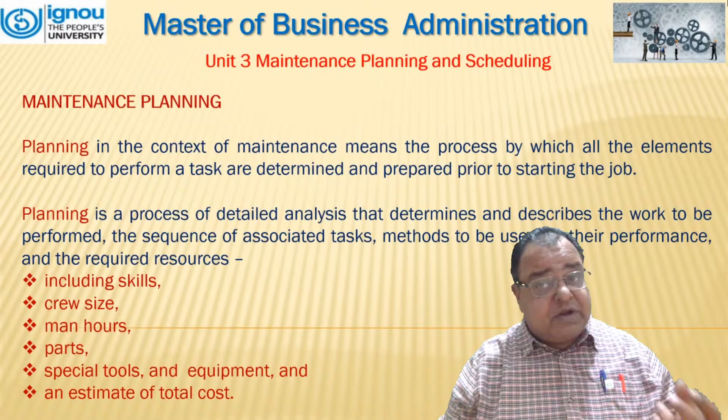It also includes identification of safety precautions, required permits, communication requirements, and the reference documents such as drawings and wiring diagrams.

It addresses essential preparation, execution, and startup efforts, work estimates - that is, the setting of job duration and labor estimates, how much manpower and man hours will be required - and the activation of required procurements are part of the planning process. Maintenance planning is a systematic process that involves identifying, scheduling, and organizing maintenance activities to ensure assets and equipment operate efficiently, safely, and reliably.

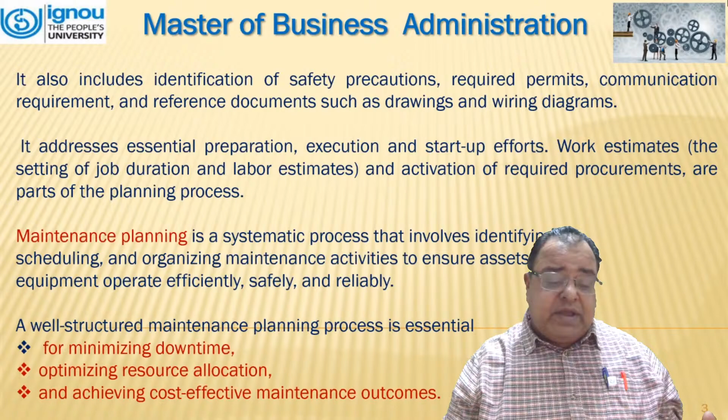A well structured maintenance planning process is essential for minimizing downtime, optimizing resource allocation, and achieving cost effective maintenance outcomes.

Maintenance planning serves several critical purposes, such as minimizing downtime. By scheduling maintenance during planned downtime, unplanned interruptions to operations can be reduced.

Second is resource optimization. Efficient allocation of labor, material, and equipment leads to cost effective maintenance execution.

Third is safety. Proper planning includes safety precautions and measures, ensuring the well being of personnel and assets.

Fourth is asset longevity. Regular and well planned maintenance helps extend the life of the assets, maximizing return on investment.

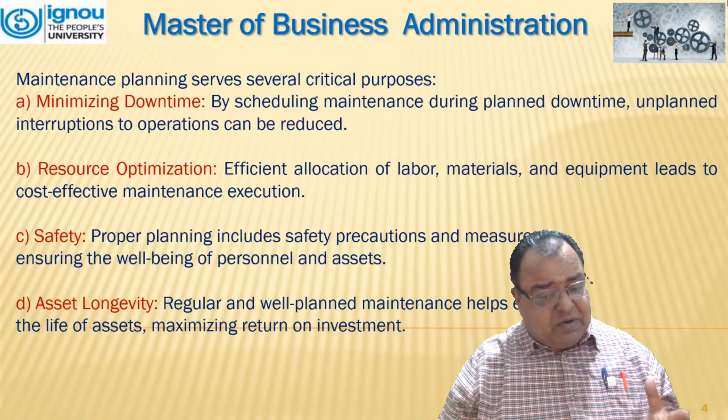The planning process comprises all the functions related to the preparation of the work order, bill of material, purchase requisition, necessary drawings, labor planning sheets, job standards, and all the data needed prior to scheduling and releasing the work order. An effective planning procedure should include the following.

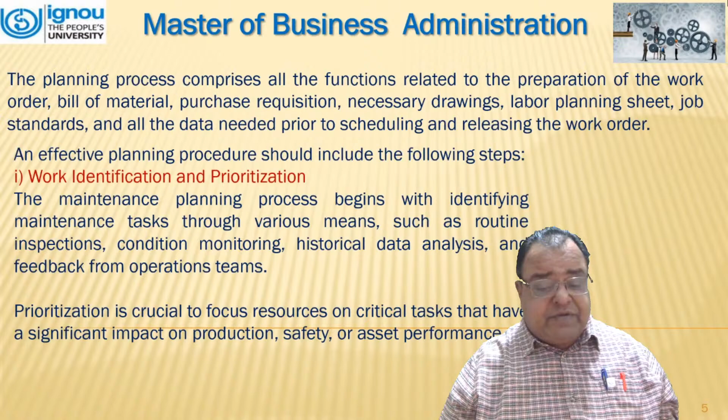First is work identification and prioritization. The maintenance planning process begins with identifying maintenance tasks through various means such as routine inspection, condition monitoring, historical data analysis, and feedback from the operations team. Prioritization is crucial to focus resources on critical tasks that have a significant impact on production, safety, and asset performance.

Secondly, defining scope and objectives. Each maintenance task should have a clearly defined scope, including the specific work to be performed, necessary resources, and expected outcomes. Objectives such as reducing downtime or improving asset reliability should also be outlined.

Third is resource allocation. Efficient resource allocation involves determining the manpower, tools, equipment, and material required for each maintenance task. This ensures that resources are available when needed and that maintenance activities are not delayed due to lack of resources.

Fourth is estimating job duration and complexity. Accurate estimation of task duration is essential for effective scheduling. Complex tasks might require longer preparation time or specialized expertise, while routine tasks can be completed quickly.

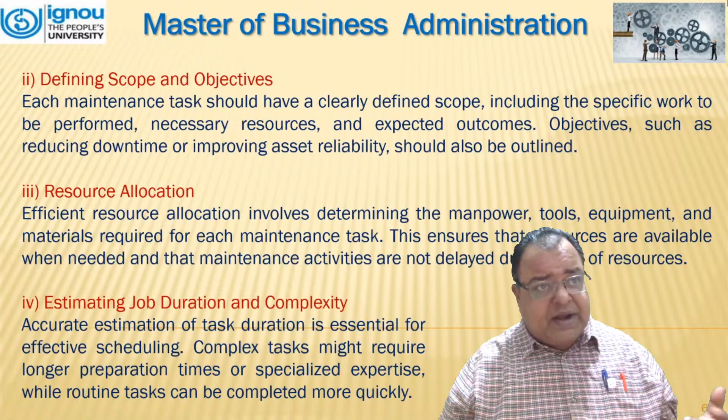Fifth is developing maintenance work orders. Maintenance work orders are detailed documents that outline the task, resources, safety precautions, and scheduling of each maintenance activity. They serve as a guide for maintenance technicians and provide a record of the work performed.

Now, what is the role of a maintenance planner? The basic maintenance planning principles are: the maintenance planners are organized into a separate department to facilitate specializing in planning techniques as well as focusing on future work.

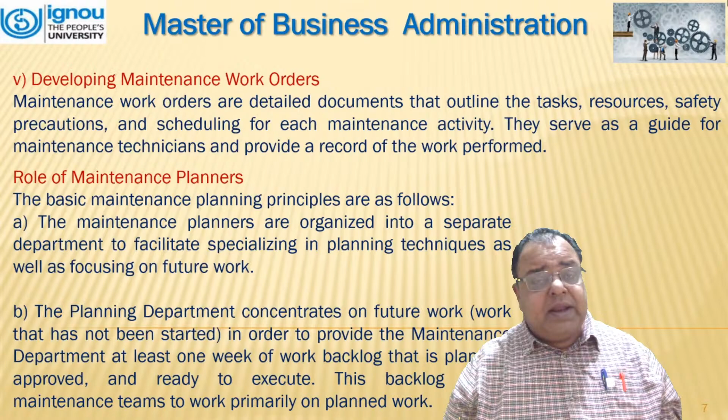Secondly, the planning department concentrates on future work, work that has not been started, in order to provide the maintenance department at least one week of work backlog that is planned, approved, and ready to execute. This backlog allows the maintenance department to work primarily on planned work.

The planning department maintains a simple, secure file system based on equipment tag numbers. This file system enables planners to utilize equipment data and information learned on previous work to prepare and improve work plans, especially on repeated maintenance tasks.

The majority of maintenance tasks are repetitive over a sufficient period of time. Fourthly, the planners use personal experience and file information to develop work plans to avoid anticipated work delays and quality or safety problems. As a minimum, planners are experienced top level technicians that are trained in planning techniques.

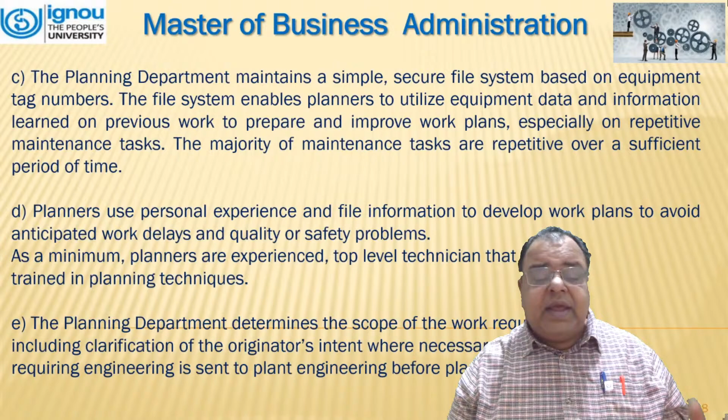Fifth, the planning department determines the scope of the work request, including clarification of the originator's intent where necessary. That is, work requiring engineering is sent to plant engineering before planning.

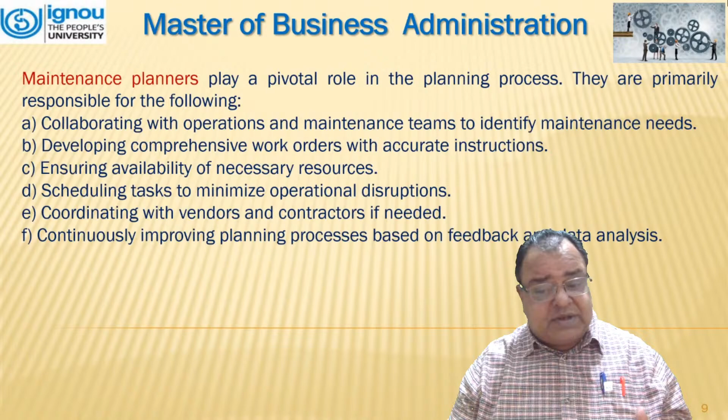Maintenance planners play a pivotal role in the planning process. They are primarily responsible for collaborating with operations and maintenance teams to identify maintenance needs, developing comprehensive work orders with accurate instructions, ensuring availability of necessary resources, scheduling tasks to minimize operational disruptions, coordinating with vendors and contractors if needed, and continuously improving planning processes based on feedback and data analysis.

The next part is maintenance scheduling. Maintenance scheduling is a critical aspect of effective maintenance management that involves coordinating and sequencing maintenance tasks in a way that optimizes asset availability, minimizes operational disruptions, and maximizes resource utilization. A well structured maintenance schedule ensures that maintenance activities are performed efficiently while aligning with production requirements. Maintenance scheduling plays a crucial role in achieving operational efficiency, asset reliability, and cost effectiveness by minimizing disruptions.

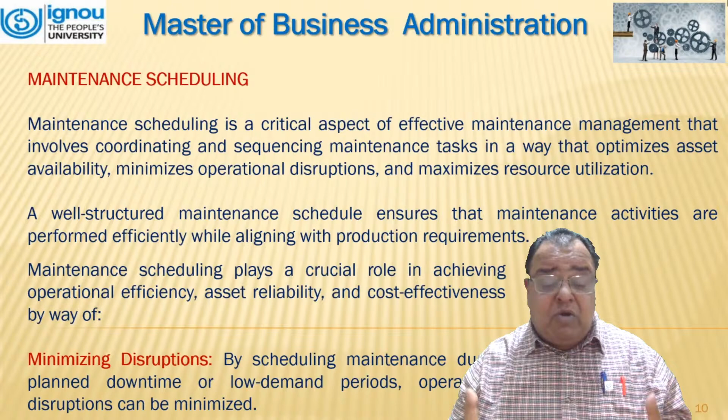That can only be done by scheduling maintenance during planned downtime or low demand periods. Operational disruptions can be minimized. Optimizing resource utilization means efficient scheduling ensures that labor, material, and equipment are used effectively, reducing costs, and balancing production and maintenance needs. Scheduling prevents conflict between production and maintenance requirements.

Maintenance scheduling is a process by which jobs are matched with resources and sequenced to be executed at a certain point in time.

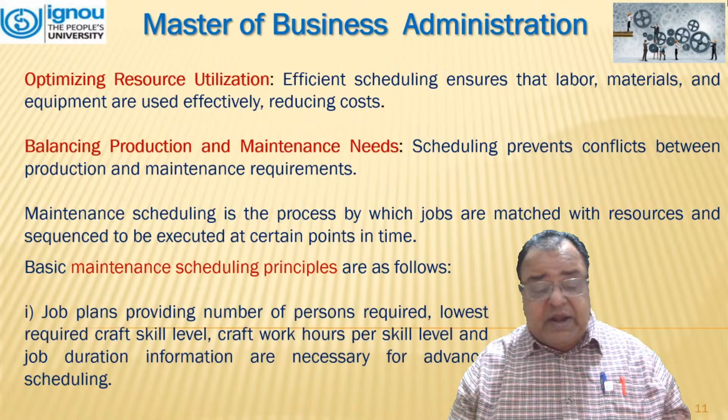Basic maintenance scheduling principles are: job plans providing number of persons required, lowest required craft skill level, work hours per skill level, and job duration information are necessary for advanced scheduling. Weekly and daily schedules must be adhered to as closely as possible. Priorities must be placed on new work orders to prevent undue interruption of these schedules.

Thirdly, a scheduler develops a 1 week schedule for each crew based on craft hours available, forecast that shows highest skill levels available, job priorities, and information from job planners.

Fourthly, the 1 week schedule assigns work for every available worker. The schedule allows for emergencies and high priority reactive jobs by scheduling a sufficient amount of work hours on easily interrupted tasks. The crew supervisor develops a daily schedule 1 day in advance using current job progress, the 1 week schedule, and new high priority reactive jobs as a guide.

The crew supervisor matches personnel skills and tasks. The crew supervisor also handles the current day's work and problems, even to rescheduling the entire crew for emergencies.

Wrench time is the primary measure of workforce efficiency and of planning and scheduling effectiveness. Work that is planned before assignment reduces unnecessary delays during jobs, and work that is scheduled reduces delay between jobs. There are several types of maintenance scheduling approaches, which can be broadly categorized into the following three types.

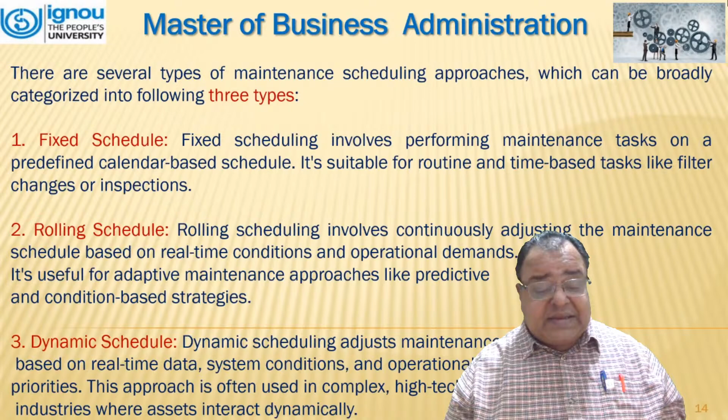Planning the maintenance work is a prerequisite for sound scheduling. While a robust maintenance plan ensures flawless scheduling of maintenance jobs, it is often suggested that the following steps need to be followed while drawing up a maintenance schedule.

First one is work order review: how much work has to be performed. The scheduling process starts with reviewing maintenance work orders, understanding their scope, and assessing the resources required. This also involves sorting out backlog work orders by crafts.

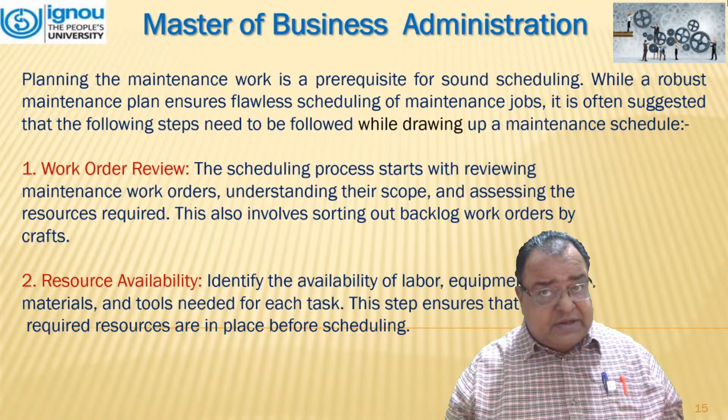Secondly, resource availability. Identify the availability of labor, equipment, materials, and tools needed for each task. This step ensures that required resources are in place before scheduling.

Third one is task sequencing. Determine the optimal sequence in which tasks should be performed. Sequencing considers factors such as task dependency, resource availability, and production needs. Also considered are job duration, location, travel distance, and the possibility of combining jobs in the same area.

Fourth one is downtime coordination. For tasks that require asset downtime, coordinate with production to minimize the impact on operations.

Fifth one is schedule creation. We generate a comprehensive maintenance schedule that outlines the timing, sequence, resources, and estimated duration of each task.

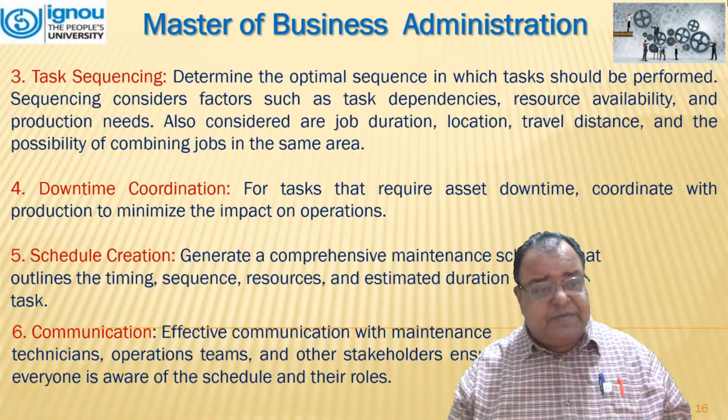Sixth one is communication. Effective communication with maintenance technicians, operation teams, and other stakeholders ensures everyone is aware of the schedule and their roles. The maintenance schedule can be prepared at three levels, depending on the horizon of the schedule. Level 1 is long range, or master schedule.

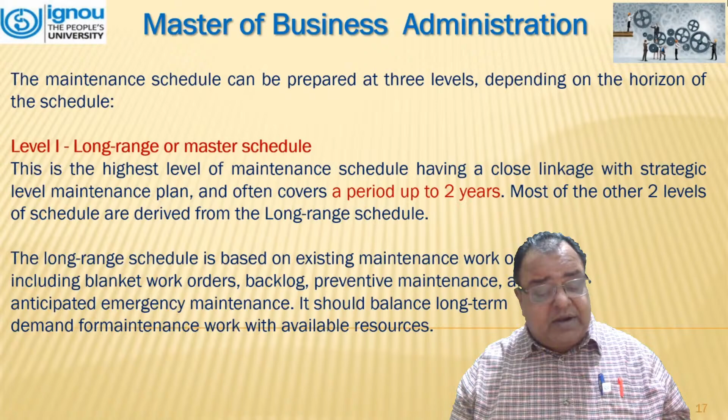This is the highest level of maintenance schedule, having a close linkage with strategic level maintenance plan, and it covers a period of up to 2 years. Most of the other two levels of such schedules are derived from the long range schedule. Long range schedule is based on existing maintenance work orders, including blanket work orders, backlog, preventive maintenance, and anticipated emergency maintenance. It should balance long term demand for maintenance work with available resources.

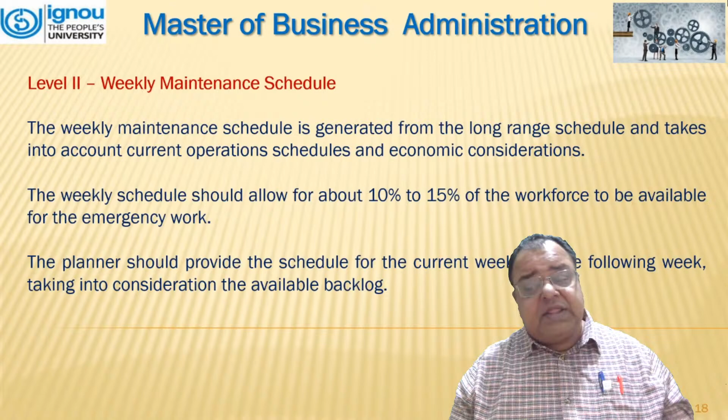Level 2 is weekly maintenance schedule. The weekly maintenance schedule is generated from the long range schedule and takes into account the current operation schedules with economic considerations. The weekly schedule should allow for about 10 to 15% of the workforce to be available for emergency work. The planner should provide the schedule for the current week and the following week, taking into consideration the available backlog if they are there.

Level 3 is daily maintenance schedule. As the name suggests, this schedule encompasses the work of maintenance tasks to be completed on a daily basis. The daily schedule is generated from the weekly schedule and is usually prepared the day before. This schedule is frequently interrupted to perform emergency maintenance. The established priorities are used to schedule the jobs, and in some organizations, the schedule is handed to the area supervisor who assigns the work according to the established priorities.

Now we have heard the word maintenance work orders. Now we will see what these actually are. The exercise of maintenance scheduling results in creation of maintenance work orders. Maintenance work orders are essential documents that serve as a roadmap for executing maintenance tasks. They provide a detailed description of the work to be performed, necessary resources, safety precautions, and scheduling.

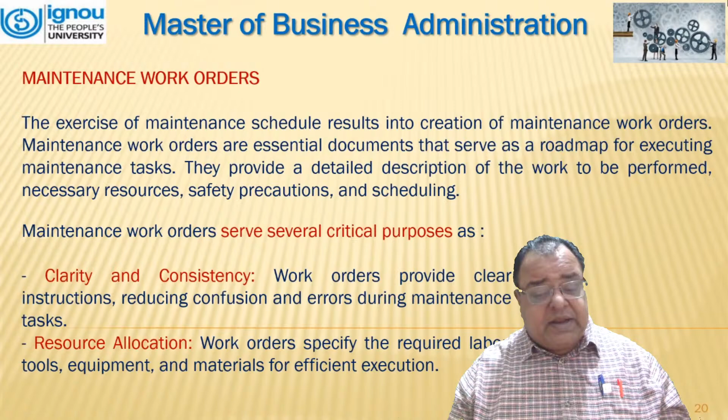Maintenance work orders serve several critical purposes, such as clarity and consistency. Work orders provide clear instructions, reducing confusion and errors during maintenance tasks. Secondly, resource allocation - work orders specify the required labor, tools, equipment, and materials for efficient execution. Third is safety - safety instructions and precautions are outlined to protect personnel and assets from damage. Fourth is documentation - work orders create a historical record of maintenance activities, aiding in future analysis and decision making.

A comprehensive work order should include the following components. First is asset information, which specifies the equipment or asset to be worked on, including its location, identification number of the machine, and any relevant technical details.

Secondly, description of the work - what is the nature. Provide a clear and detailed description of the maintenance task to be performed. This may include specific steps, procedures, and special instructions.

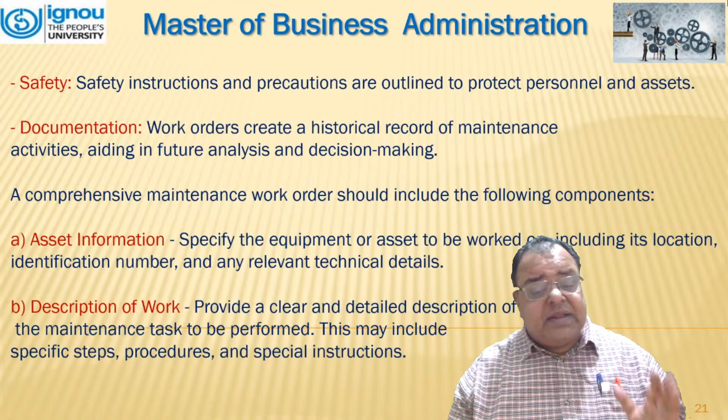Thirdly, resource requirements - outline the necessary resources such as skilled labor, tools, equipment, and materials needed to complete the task. Safety precautions, which includes safety guidelines and precautions that must be followed to ensure the well being of the personnel and the protection of the assets.

Scheduling - this specifies the start and end dates of the maintenance task. For tasks that require downtime, ensure coordination with production schedules. Authorization and signatures - this includes space for necessary approvals and signatures from relevant parties such as maintenance supervisors, managers, or safety officers.

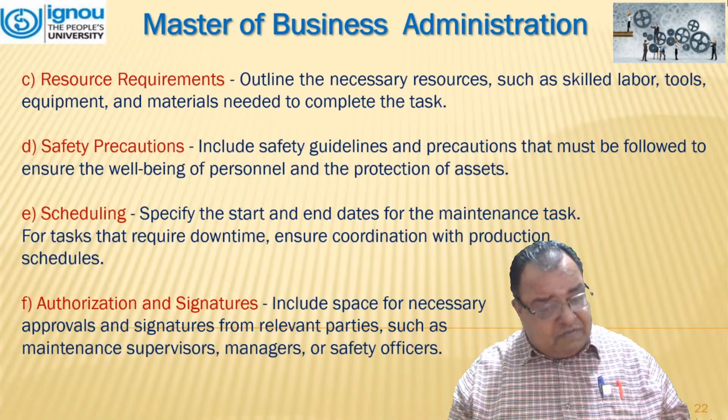Depending on the organization's needs and the complexity of the task, an organization may adopt various forms of maintenance work order systems, starting from manual systems to a highly automated process with the support of technology. Some of these are paper-based forms. These are traditional paper-based forms that provide a structured template for writing down work order details, and they are easily accessible and can be used in various environments because that is only information on paper.

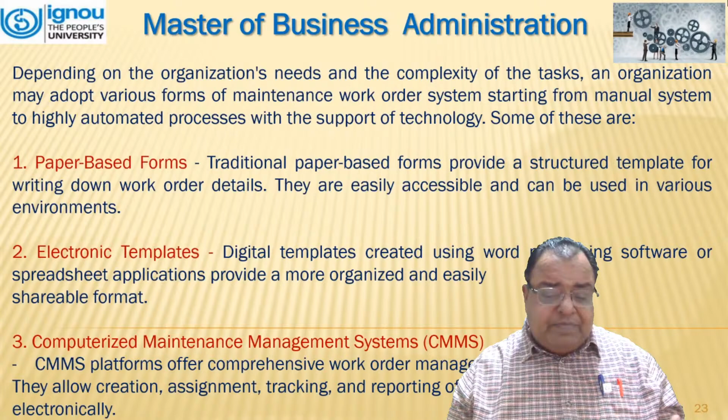Second one is electronic templates. Digital templates created using word processing software or spreadsheet applications provide a more organized and easily shareable format. Third one is computerized maintenance management system, that is CMMS. This CMMS platform offers comprehensive work order management. They allow creation, assignment, tracking, and reporting of work orders electronically.

Fourth one is mobile application. Mobile apps enable technician access and update of work orders in real time, enhancing communication and efficiency. The fifth one is barcode or QR code, that is quick response code, work orders. Using barcodes or QR codes on equipment allows technicians to quickly scan and access digital work order details.

Now we move to block 2, that is maintenance resource management. In that, unit 4 is there, which is maintenance costing and budgeting. That means now we will be talking about the costs and how the budgeting process for maintenance application is performed in an organization. All the big manufacturing units maintain their own maintenance and repair department. A series of service order accounts are opened to ascertain the exact cost of each maintenance or repair work.

Each service order will be given a distinct number and will be debited with all expenditure of material, labor, and other direct charges for repair and maintenance. An addition is also made for work and office indirect expenses on a suitable basis. The total will then be included in factory overheads and is also used for maintenance planning, budgeting, and control.

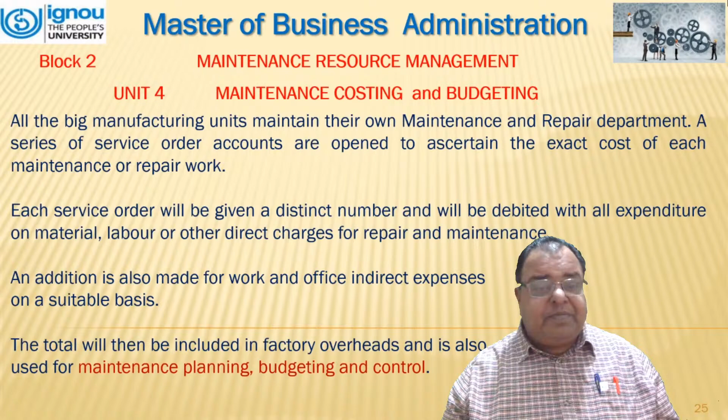Sometimes an expenditure is incurred by the company's own workmen, which gives rise to a capital asset. In such cases, the expenses on material and labor are debited to the capital order account. All such expenditures will not be debited to work overhead, but be capitalized by passing on an appropriate entry in the books of account.

Maintenance cost is generally the total cost incurred in doing the maintenance job and keeping a maintenance organization. The treatment of costs associated with other activities like constructions, modifications, rearrangement, and removal of building equipment and assets depends on the nature of job undertaken.

Cost of no maintenance or inadequate maintenance are like opportunity costs. These lost opportunities include a lower rate of output, poor quality of products, wastage, defects, damage to equipment, reduction in useful life of the equipment, etc. These costs are not recorded in any accounting system and are often overlooked while exercising control over maintenance costs. A good maintenance policy should incorporate the maintenance and lost opportunity costs due to inadequate maintenance.

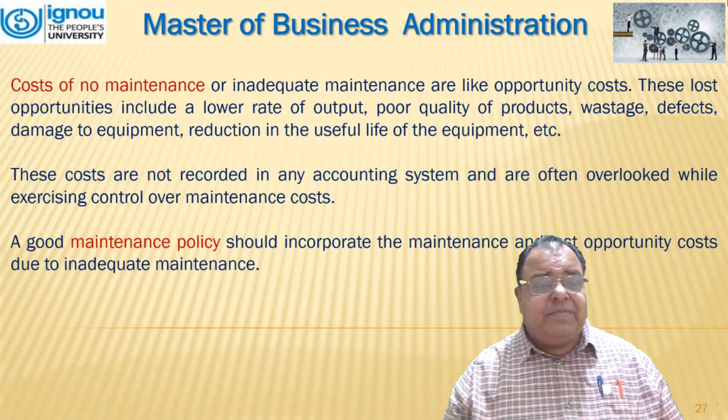Now, what is meant by maintenance costing? Costing is a technique of ascertaining costs and it consists of analyzing, recording, classifying, and appropriately allocating expenditures to determine the cost of products or services, comparing them against standards or budgets, reporting and recommending.

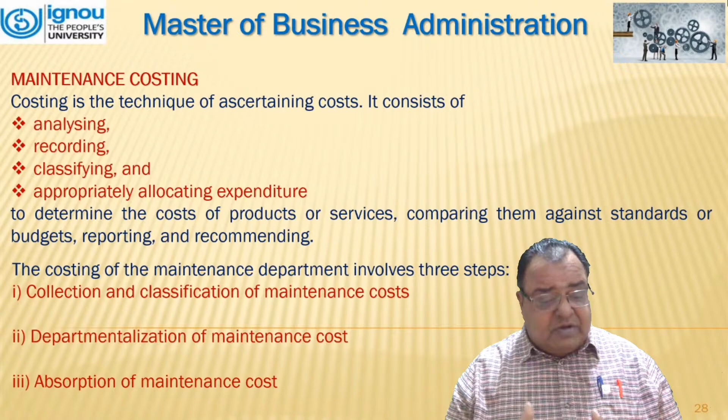The costing of the maintenance department involves three steps. First is collection and classification of maintenance costs. Second is departmentalization of maintenance cost. And the third is absorption of maintenance cost.

We'll see what collection and classification of maintenance cost is. Maintenance cost includes cost incurred on a large number of activities. These could be cost of manpower and facilities dedicated to maintenance department for repair and maintenance, cost of preventive maintenance to improve the availability of the assets, and cost of resources like equipments and other facilities for condition monitoring and diagnostic maintenance.

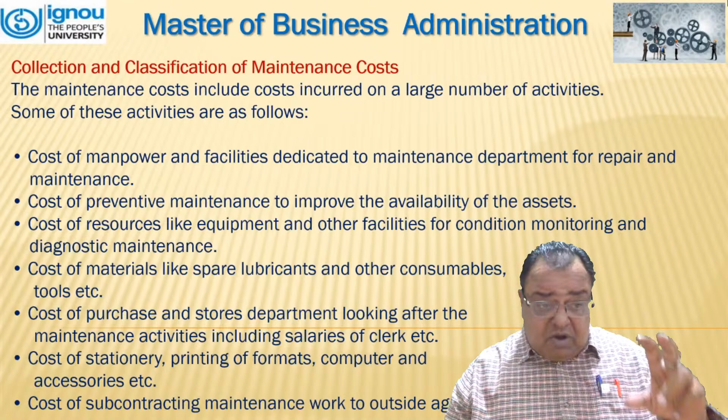Cost for material like spare lubricants and other consumables, tools, etc. Cost for purchase and stores department, looking after the maintenance activities, including salaries of clerks, etc. Cost of stationery, printing of formats, computers and accessories. Cost of subcontracting maintenance work to outsider agencies. All these parameters are included into the maintenance cost.

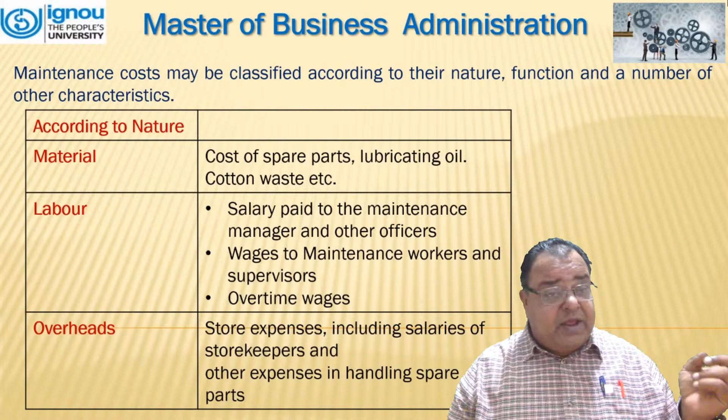Maintenance cost may be classified according to their nature, function, and number of other characteristics. When we talk about material, it includes the cost of spare parts, lubricating oil, cotton waste, etc. In terms of labor, salary paid to the maintenance manager and other officers, wages to maintenance workers and supervisors, and overtime wages are also included. Thirdly, overheads include store expenses, including salaries of storekeepers and other expenses in handling spare parts.

The second norm is according to normality - normal maintenance cost and abnormal maintenance cost. According to the type of maintenance action, it can be breakdown maintenance activity or preventive or planned maintenance activity. According to controllability, it's controllable cost and uncontrollable cost. According to behavior, it could be fixed cost, variable cost, and semi-variable cost. And according to the type of budget, it is revenue cost or capital cost.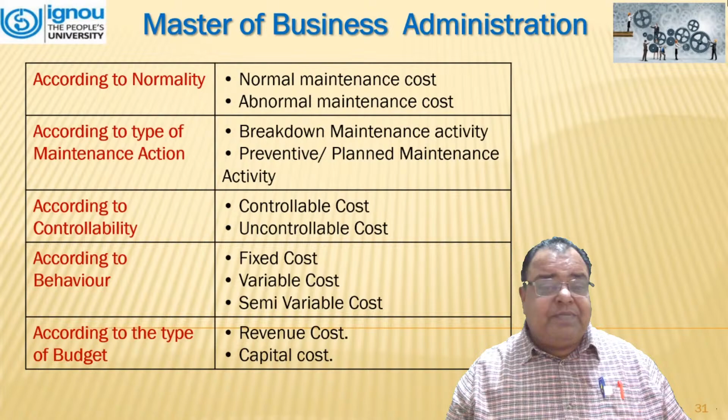Second one was departmentalization of maintenance cost. After classification and collection of maintenance cost, the next step is distribution of cost to the different processes, equipments, products or departments. This involves the allocation and apportionment of maintenance cost.

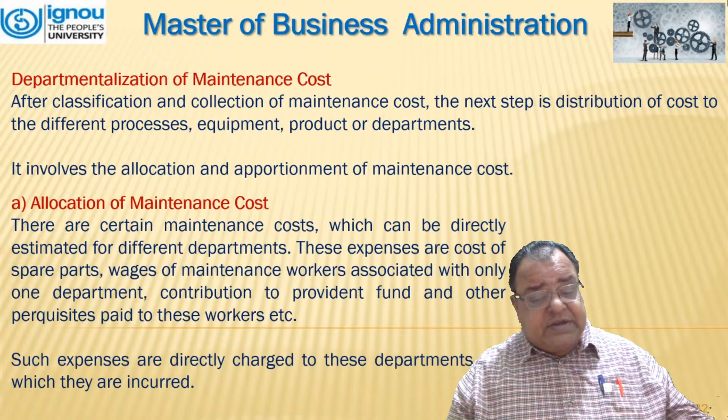Allocation of maintenance costs - under this, there are certain maintenance costs which can be directly estimated for different departments. These expenses are cost of spare parts, wages of maintenance workers associated with only one department, contribution to provident fund and other perquisites paid to these workers, etc. Such expenses are directly charged to these departments for which they are incurred.

Second one is apportionment of maintenance cost. Certain expenses such as salary of maintenance manager and maintenance staff catering to more than one department, consumables like lubricating oil, gloves, cotton waste, etc., are incurred for the factory as a whole, and therefore they will have to be apportioned over all departments. There is no hard and fast rule as regards the basis to be applied for apportionment of maintenance costs.

The following methods can work as guiding rules. It can be according to the capital value of the asset, according to technical estimates, according to production hours of the equipment, actual services utilized if records are available, according to hours worked on each equipment or department, and according to past experience.

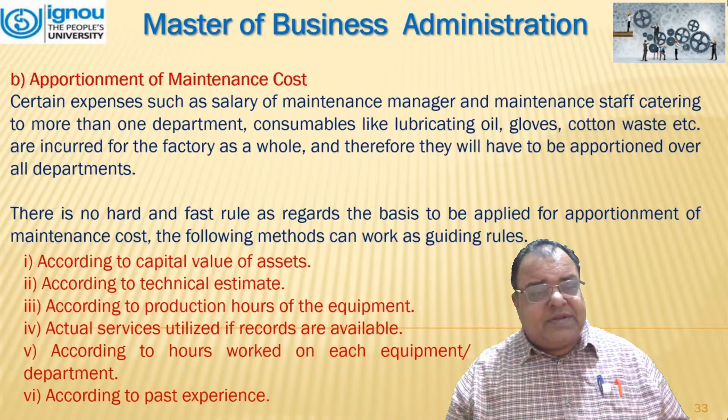Now, distribution of office and administration overheads of maintenance department. The office overheads of maintenance department shall be charged to different equipments, processes, departments on a suitable basis. Since maintenance overheads constitute a small portion of the total cost, it will not be advisable to follow a complicated method for their absorption. A blanket overhead rate may be computed for the entire maintenance work, calculated as total maintenance overhead divided by total maintenance cost into 100.

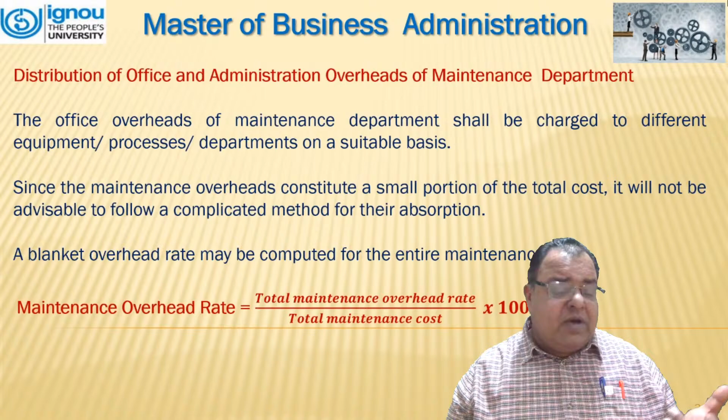The following are some of the guidelines in devising a procedure. We should avoid duplication and unnecessary work in meeting the different needs of the accounting and maintenance department, and ensure that the procedure provides timely information to both departments in a form which aids effective control.

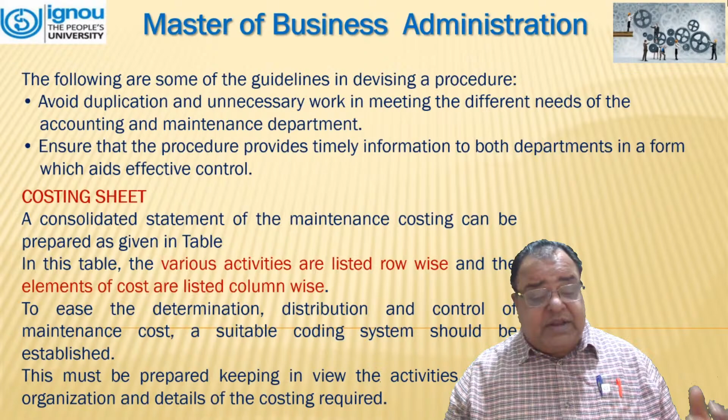Then comes the costing sheet. A consolidated statement of maintenance costing can be prepared as given in the table. In this table, the various activities are listed row-wise and the elements of cost are listed column-wise. To ease the determination, distribution, and control of maintenance cost, a suitable coding system should be established, prepared keeping in view the activities of the organization and details of costing required.

The production establishment of the organization and the work classification within them must be coded in a manner that segregates them by units, operations, or plant. Similar items at different units should have a common code modified to identify the particular unit concerned. Further, these operations and activities must be allotted the appropriate cost account classification, which must be so coded as to segregate them. If these two requirements are met, costs can be equitably distributed and controlled with any desired degree of refinement.

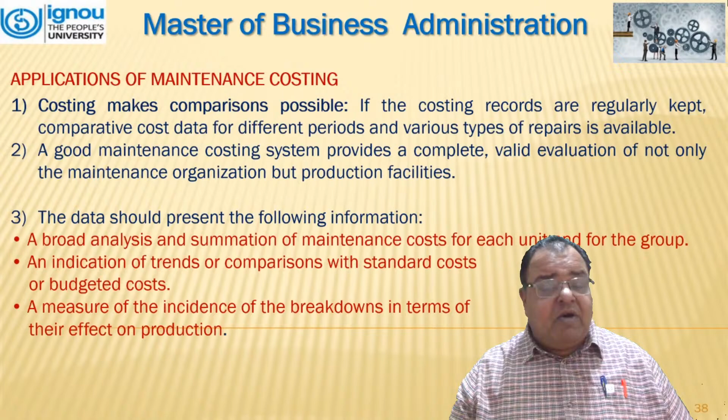Fourthly, the report of the costing can be useful in the following manners: labor control and productivity improvement, workload measurement, formulation of objectives and policies, production cooperation, and staff department service.

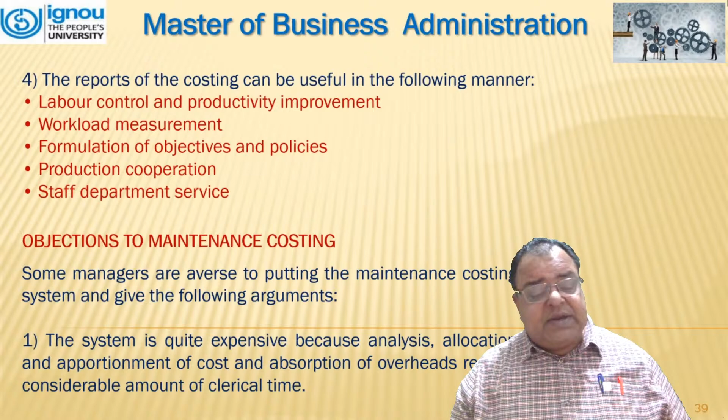Now, what are the objections to maintenance costing? Some managers are averse to putting a maintenance costing system in place and give the following arguments. The system is quite expensive because analysis, allocation, and apportionment of cost and absorption of overheads require considerable clerical time. Secondly, a costing system in itself does not control cost or improve efficiency. If management is alert and efficient, it can control costs without the aid of this system.

The next title is maintenance budgeting. A budget is a detailed plan of operations for some specific future period. It is an estimate prepared in advance of the period to which it applies. Different types of budgets are prepared by an industrial concern for different purposes. The maintenance budget is an estimate of requirements for spare parts, manpower, consumables, and other expenses, prepared to bring efficiency and economy in maintenance activities.

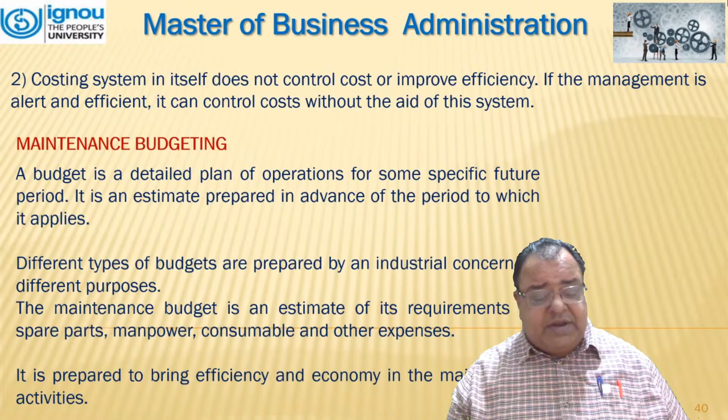Five key elements of maintenance budget. When creating a maintenance budget for the first time, there are five inputs one must take into account: asset status, original equipment manufacturers data, historical performance, operating strategy, and maintenance strategy.

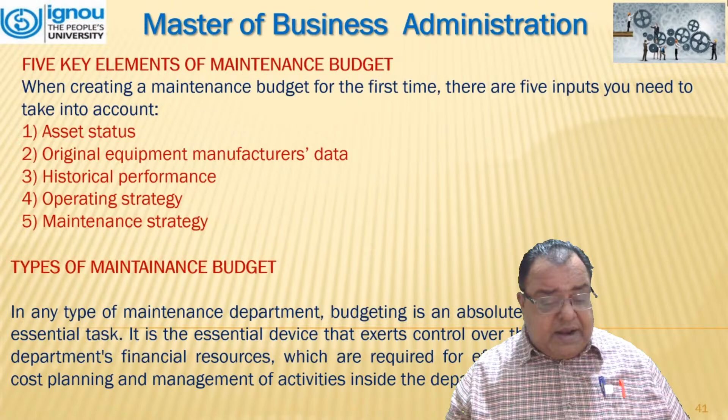What are the different types of maintenance budgets? In any type of maintenance department, budgeting is an absolutely essential task. It is the essential device that exerts control over the department's financial resources, which are required for efficient cost planning and management of activities inside the department.

There are typically two distinct budget formats utilized in the upkeep and maintenance of facilities. Both of these budgets are referred to as the operational budget and the project budget.

The operating budget evaluates each category of operating expenses projected for every department within the organization. It usually consists of at least four headings: the cost of labor, the cost of required materials, the cost of tools and technical resources, and the cost of contracted services.

The cost of labor consists of four concepts: the annual fixed amount received by each department worker, staff transport costs to the plant (in some countries the employer takes care of this cost), and organizations with excellent management promote training among workers by subsidizing training costs and obligatory social costs of the organization.

The second type is the project budget. This budget is concerned with special projects such as major capital equipment purchases and major construction projects. The funds required for such projects are not included in the operating cost, but come from another source. The project budget is divided into different types, such as labor, material, and overhead expenses needed to complete the defined project.

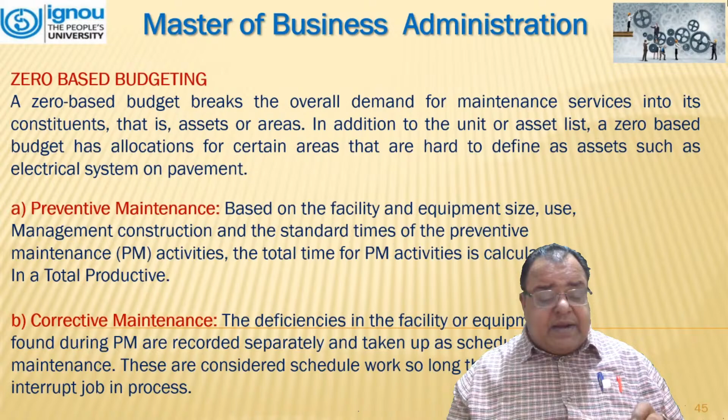The third one is user maintenance, or UM, which is maintenance based on requests received from the user department. This includes both routine and breakdown maintenance required. Previous year's data can be used to budget this exercise.

Seasonal maintenance includes review of roofing and checking of air conditioners before summer. Some percentage of seasonally driven emergencies are also included in this list, and budgets are based on history.

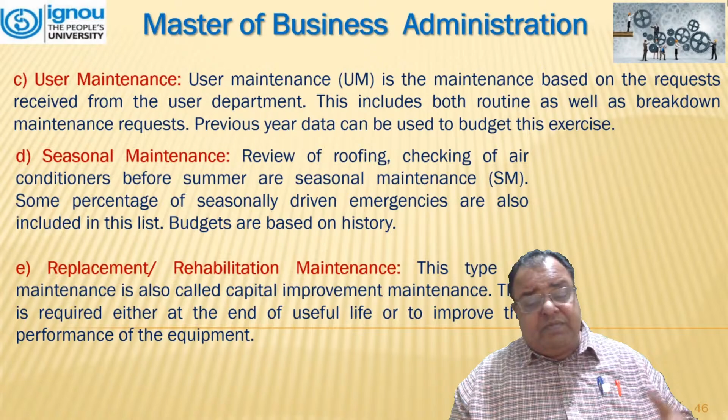The fifth type is replacement and rehabilitation maintenance, also called capital improvement maintenance. This is required either at the end of useful life of equipment or to improve its performance.

Social demand activities include preparation for visiting dignitaries or work on non-organizational equipment and facilities, that is, charity work. These estimate the hours and material needed for such activities.

Expansion: any expansion in the size of facility, size of workforce, or addition of scope of control will expand the overall budget requirements. New facilities disrupt current activities as well as taking direct time.

Catastrophes: every part of the country has characteristic catastrophes, such as floods, hurricanes, fire, or even earthquakes, and some labor hours and materials are budgeted for this.

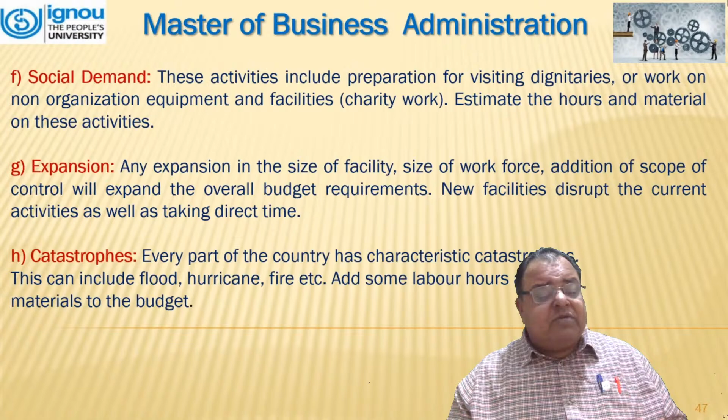What is the importance of a maintenance budget? The process of developing a comprehensive maintenance budget can be difficult, as there are many factors to take into account, several stakeholders to consult, and a large amount of data to sort through.

Because of the difficulty of the task, some maintenance managers are tempted to simply use the expenditures from the year before and increase them by a small amount. Bearing in mind the repercussions that could result from doing it wrong, this strategy is not always the most appropriate one.

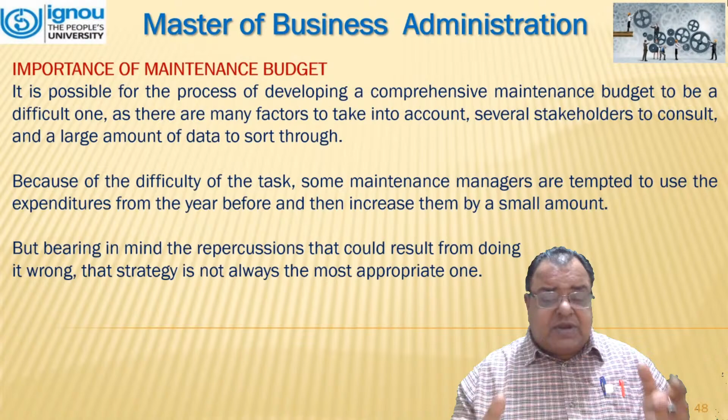Now, Unit 5, which is spare parts and inventory management.

The management of a company's spare parts, stock, and warehouse are frequently tied not only to the operation of the company but also to the maintenance division of the organization. This is owing to the fact that the company's goods require repair and maintenance, which in turn requires the usage of both spare parts and stock, as well as storage space. It is an essential part of managing daily upkeep activities, as well as preparing preventive work for the foreseen future.

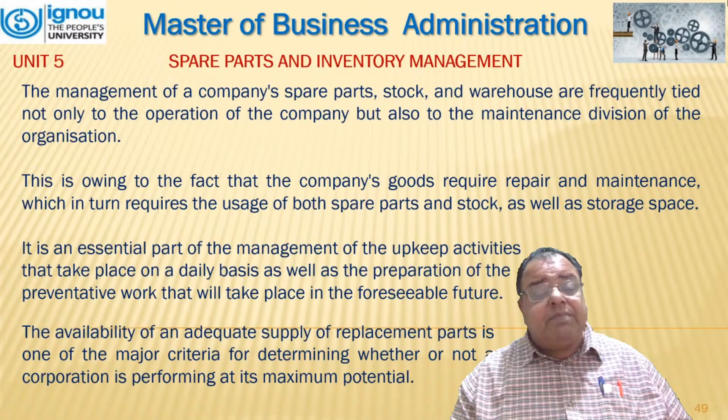The availability of an adequate supply of replacement parts is one of the major criteria for determining whether or not a corporation is performing at its maximum potential. The inventory policy can have an effect on a variety of expenditures, including the cost of purchasing inventory, the cost of retaining inventory, and the cost of an inventory shortage.

That means all parameters are included. In addition to these direct or indirect cost components, the inventory management approach that is selected is also related to a wide range of other cost components. The expenditures incurred to maintain an excellent state of inventory can be broken down into three categories: first, operations cost; second, depreciation charges; and third, investment capital costs.

Shortage cost will apply in the event that the specified demand cannot be satisfied with the currently available inventory of replacement parts. In the context of fighter operations, a lack of spare parts limits the operational availability of fighters, which in turn increases the amount of time spent on maintenance and repairs.

The availability of production equipment is increased thanks to the spare component inventory, which also helps to maintain a healthy expenditure level in relation to the amount of stock available for replacement parts and the level of service provided to internal customers.

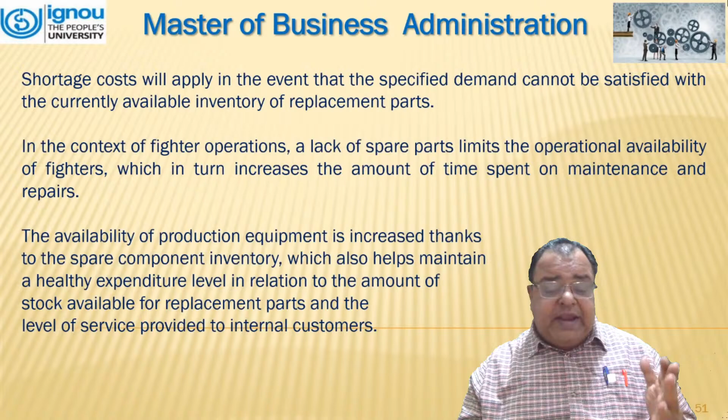What is the meaning of spare part inventory? The term spare part inventory refers to a list of stock goods that are used by maintenance professionals to replace broken down components of various pieces of equipment.

Manufacturing facilities retain a stock of spare parts on hand, including belts, motors, gears, and lubricant, so that they can repair broken pieces of equipment without having to first place an order for the part and then wait for it to be delivered. Properly managing spare parts inventory can result in considerable savings for a company.

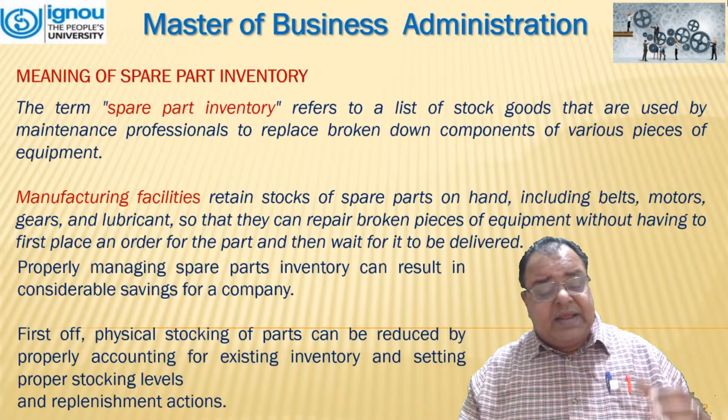First off, physical stocking of parts can be reduced by properly accounting for existing inventory and setting proper stocking levels and replenishment actions. Secondly, having the proper spare part available when required will greatly reduce production downtime and improve equipment availability.

What is the role of spare part inventory management? Spare part management plays an important role in achieving the desired plant availability at an optimum cost. Manufacturing units are normally capital intensive, mass production oriented, and with sophisticated technology.

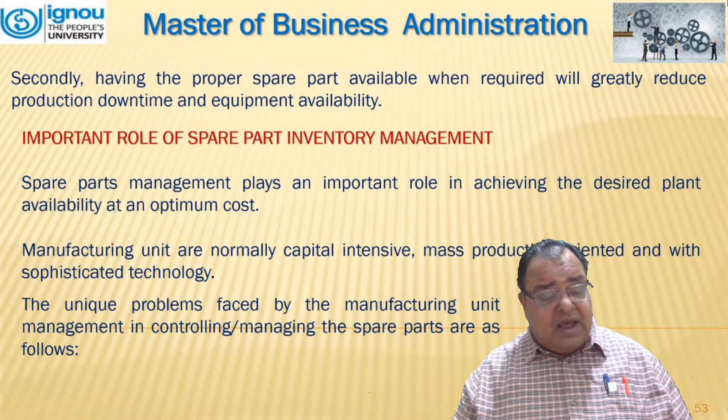The unique problems faced by manufacturing unit management in controlling or managing spare parts are: firstly, there is an element of uncertainty as to when a part is required and also the quantity of its requirement. This is due to the fact that the failure of a component, either due to wearing out or due to other reasons, cannot be predicted accurately.

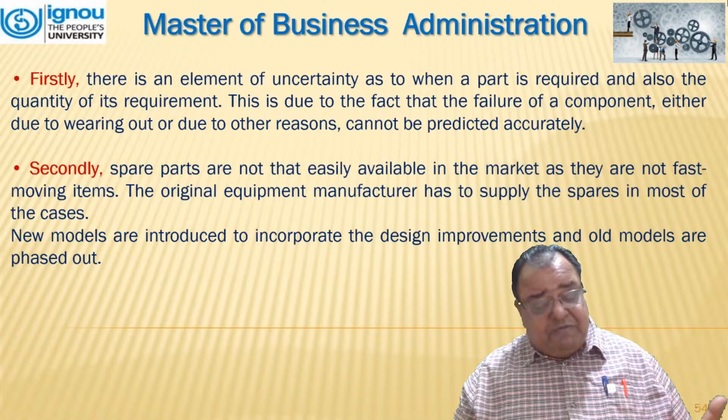Secondly, spare parts are not that easily available in the market as they are not fast moving items. The original equipment manufacturer has to supply the spares in most cases. New models are introduced to incorporate design improvements, and old models are phased out.

Thirdly, the number and variety of spare parts are too large, making close control more and more tedious. Next, there is a tendency from the stage of purchasing equipment to the stage of using spare parts to requisition more spare parts than actually required, causing accumulation of spare parts. Finally, the rate of consumption of some spare parts is very high, while for others it is very low.

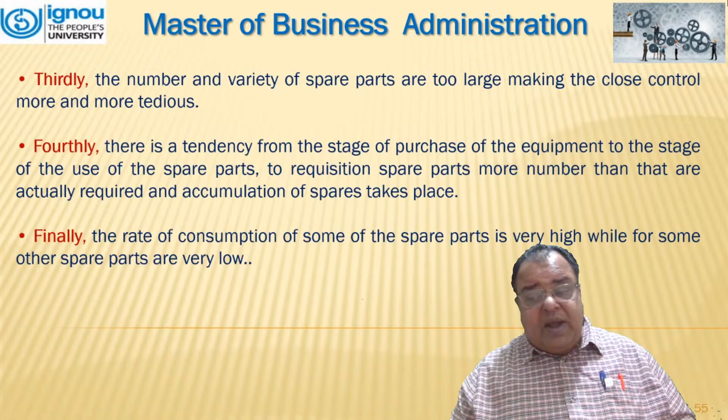What are the objectives of spare part management? The objective of spare part management is to ensure availability of spares for maintenance and repairs for the plant and machinery as and when required, at an optimum cost. Also, the spares are to be of the right quality.

Some of the benefits of utilizing a systematic approach to spare part management include reduced inventory cost, a justified basis for carrying inventory, reduced probability of running out of stock, addressing total cost of ownership for supply chain management, improved condition of spares, and linkage of spare parts level to the actual criticality of assets.

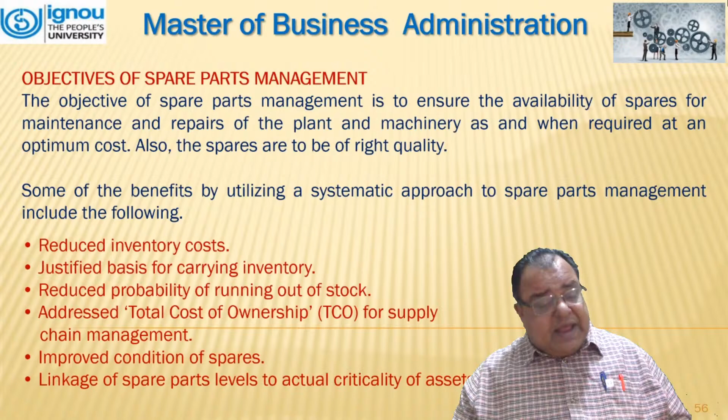What is the need? Why is it needed? Factors which necessitate scientific spare part management are: random and unpredictable pattern of failure of machines and equipment, long lead time required for procurement of spare parts from the original equipment manufacturer, difficulty in manufacturing spare parts due to non-availability of special materials, and a high tendency for obsolescence of machines and equipment.

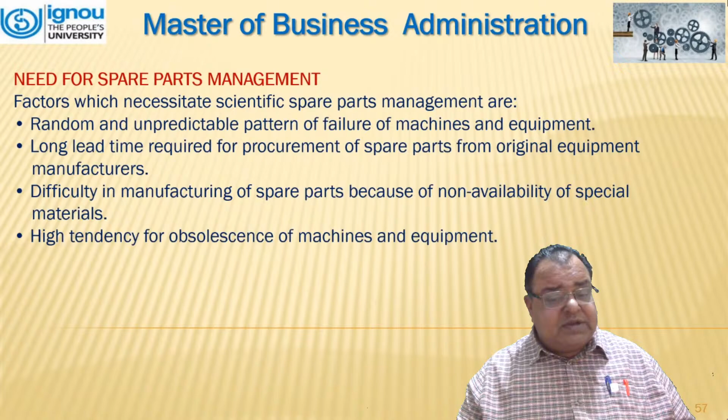With the passage of time, models change. When a model changes, its components also change. This highlights the need for an effective spare part management system.

The organization is to go forward in a methodological manner in order to build an efficient system for the management of spare parts. The organization is able to minimize the duplication of spare parts stocking, which leads to a reduction in inventory. And to ensure that the management of spare parts is effective, there are a lot of different standardized steps that need to be taken.

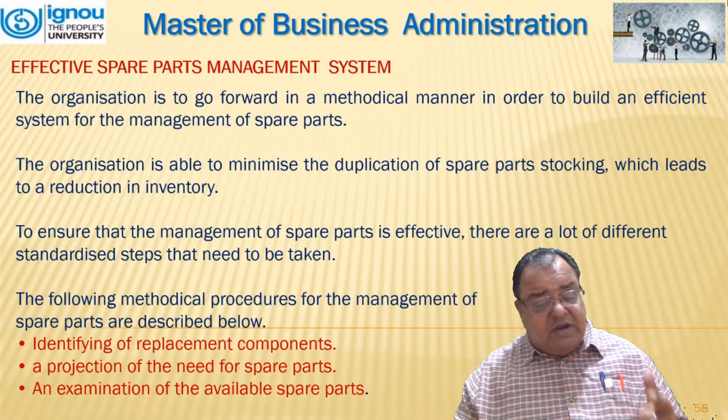The following methodological procedures for the management of spare parts are: identifying replacement components, a projection for the need of spare parts, an examination of available spare parts, establishment of regulation for the selective application of control across a variety of categories, control system for the inventory of spare parts are now being developed, maintaining a stock of insurance policies for both capital and insurance spares, policies regarding the stocking of rotating spares and sub-assemblies, replacement policy for spare parts, examination of auxiliary components, the total production of replacement parts,

remanufacturing of used or discarded components, that is recycling, the establishment of a bank of spare parts, and application of computing technology to the management of spare parts. So these are the steps which need to be taken.

Analysis of spare parts inventory. Analyzing the inventory of spare parts based on several criteria such as the frequency of issues, the annual consumption value, the criticality, the lead time, and the unit price is vital for successful management of spare parts.

These characteristics include the following. This is very important because it will not be possible to exercise the same sort of control over all the spare parts. And it is also possible that the same type of control will not be very effective over all the spare parts items.

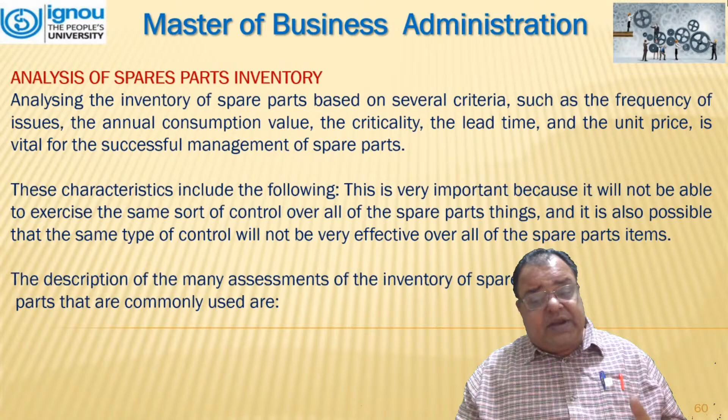The description of many assessments of the inventory of spare parts that are commonly used are FSN analysis. The frequency of problems and the amount of time spent using spare parts are taken into account in this form of classification. Now we have to understand what this FSN means.

F, this refers to the spare parts that are rapidly moved. S is spare parts that are slowly moved. And N is, this refers to the spare parts items that do not move.

This method of classification identifies the things that are frequently issued, the things that are issued for usage less frequently, and the things that are not issued for an extremely extended length of time. This classification assists management in determining the most appropriate shop layout for the spare parts inventory. In addition to this, it provides guidance to organizations regarding the distribution of resources for the purchase of replacement parts.

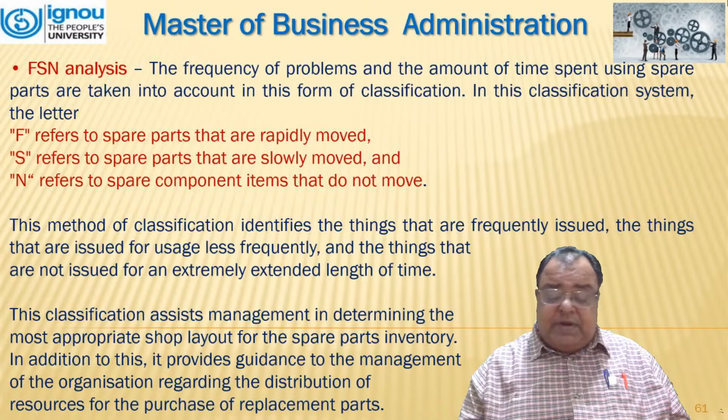Second one is ABC analysis. This method of classifying the spare part components is based on the idea of Pareto's 80-20 rule and uses the annual consumption value as the primary criterion.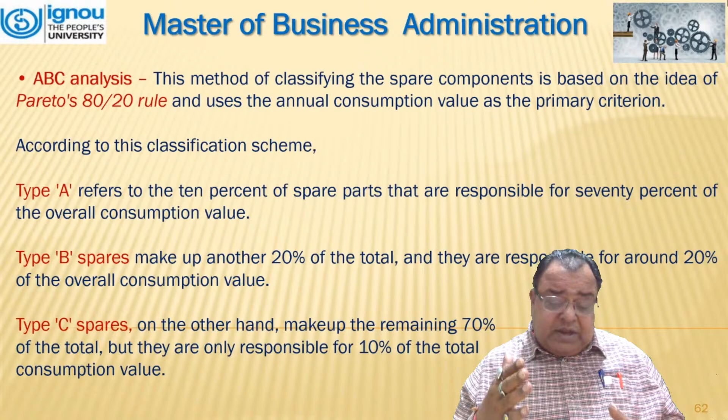According to this classification scheme, type A refers to the 10% that are responsible for 70% of overall consumption. Type B are the spares that make another 20% of the total, and they are responsible for around 20% of the overall consumption value. And the third one, type C, makes up the remaining 70% of the total, but they are only responsible for 10% of the total consumption value.

Third one is VED analysis. The degree of necessity of the spare part is taken into consideration for this kind of classification. The amount of production downtime that is lost as a result of spare parts not being accessible when required is one way to evaluate how critical a spare part is.

Conventionally, spare parts are separated into three categories, that is V for vital, E for essential, and D for desired. These categories are based on the level of importance they hold. The VED analysis is helpful in directing management's attention to key items and assuring the availability of those items through frequent evaluation and reporting.

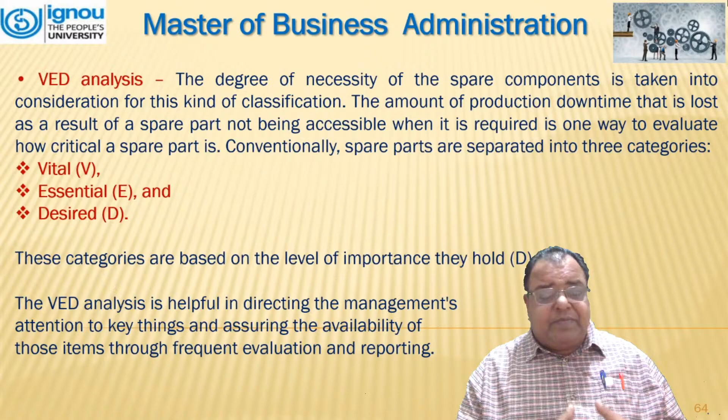With this, we will be concluding today's session.